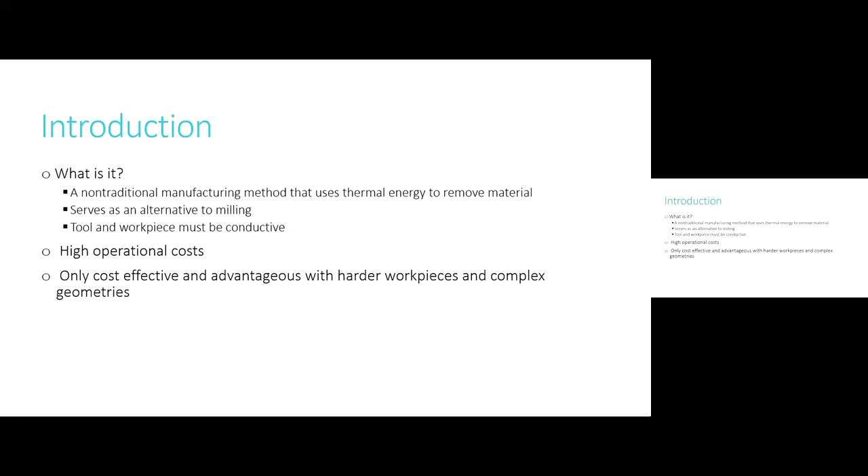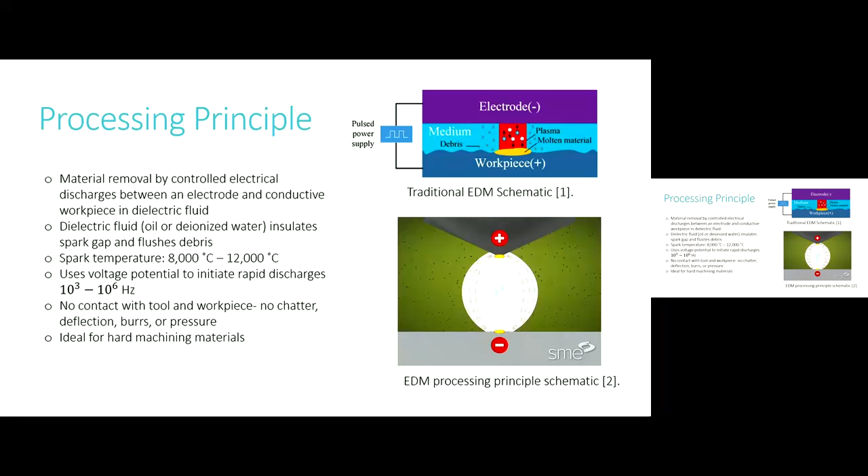Basically, when the voltage increases between the electrode and the workpiece, it's going to break down the dielectric fluid, releasing a spark that is going to act as an extreme localized heat zone up to 12,000 degrees Celsius. This is also a no-contact tool process, and it's also ideal for hard machining materials.

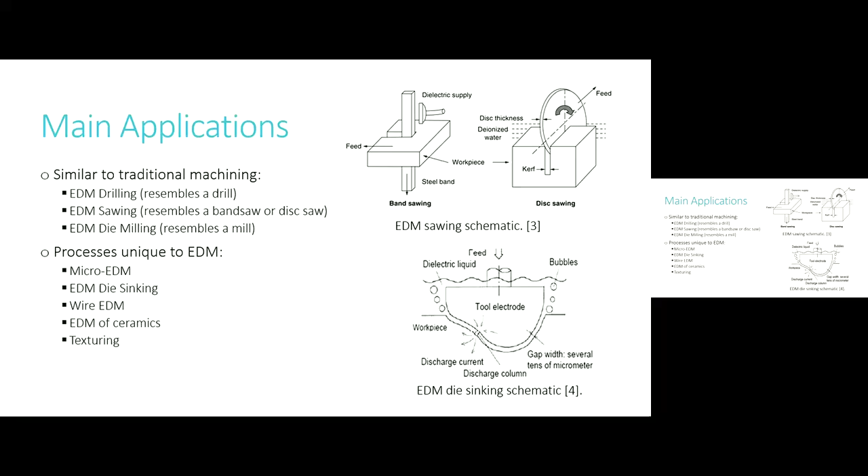Some of the main applications of EDM, we have some of the parts of EDM that resemble traditional machining, such as EDM drilling, which I guess you can guess resembles hand drilling. There's also EDM sawing, which, as you can see in this image on the top right over here,

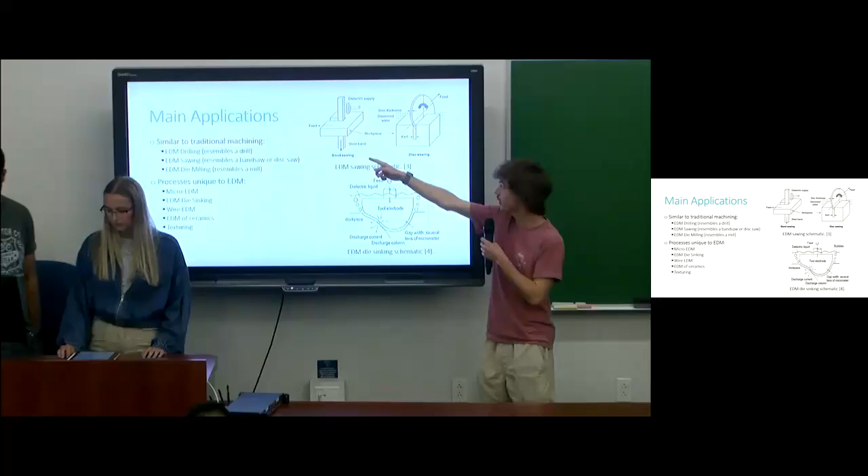resembles band sawing or disc sawing, but instead of a mechanical cutting where the cutter makes contact with the material, the tool uses electrodischarge to remove material without actually contacting the workpiece through that voltage difference in the sparks.

There's also EDM die milling, which just resembles traditional milling. There's a spinning rotating tool that uses electrodischarge to machine material rather than an actual cutter.

There's also some processes that are more unique to EDM, such as micro EDM, which we'll discuss later, EDM die sinking, which you can see on the bottom right here, which essentially makes an impression of the die by removing material with the tool, which is shaped like the die. There's also EDM of ceramics and texturing. Some of those last ones are the main applications of EDM.

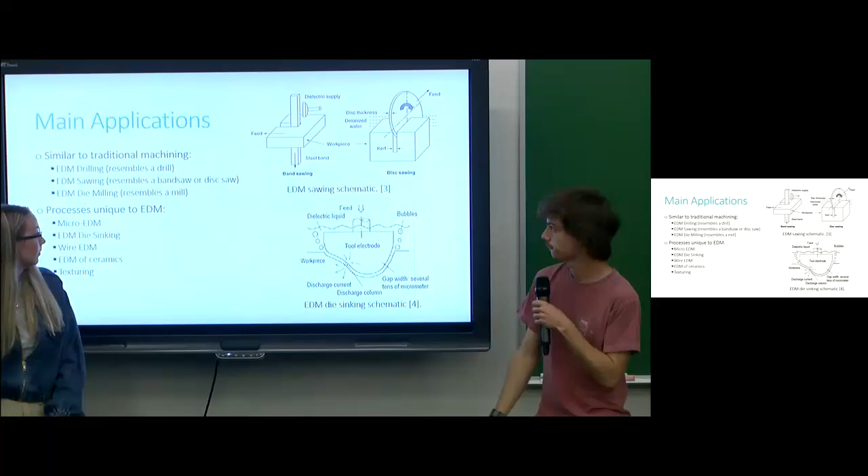Just to give you a better example of what EDM is and how it works, here's that die sinking. The tool itself is machined in the shape of whatever cavity you want to remove from the workpiece, and it is slowly introduced into the workpiece and slowly gets lowered in more and more with each pass, and there's sparks that are generated between the tool and the workpiece to remove material.

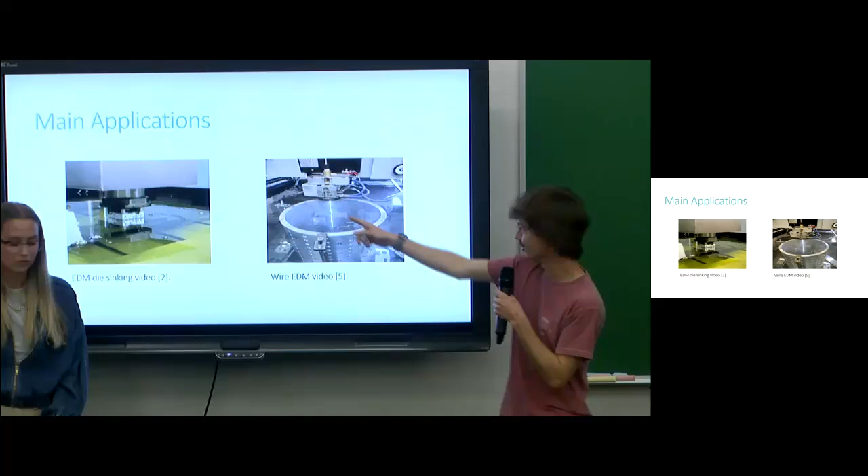Similarly, we have wire EDM here, where the wire itself is the tool, and this is the workpiece right here, and sparks are generated between the wire and the workpiece through that voltage difference, which removes material. You can see it because there's this giant blue line here. That's all of the sparks being generated, which is pretty cool. You can actually see it removing material.

The wire is constantly being refreshed because every time the spark is generated, that wire isn't usable anymore. So you have to add new wire every time.

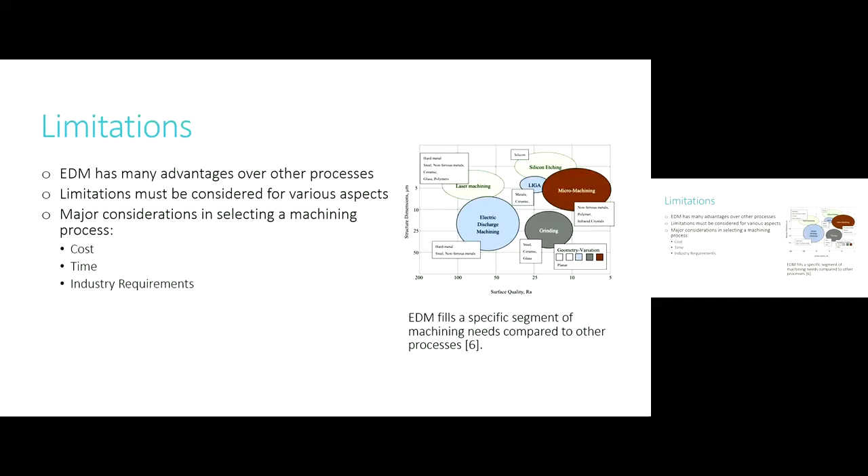So like I said, one of the biggest considerations, not just for EDM, but for any machining process, is the cost, right? So the cost kind of breaks down to two major categories. You have fixed cost and variable costs. So for fixed cost, that's things like purchasing the machine, purchasing the parts, routine maintenance, things like that. And your variable cost is things like labor, different electrodes, dielectric fluids, one-off maintenance items, staff, things like that.

So in addition to considering those, you also have to consider what you're using EDM for, right? So if you want high production speed, high production volume, or if you have very specific product parameters, that's also going to increase or decrease your cost for EDM. So like any other process, you have to balance what you need with the cost that you're willing to spend on EDM.

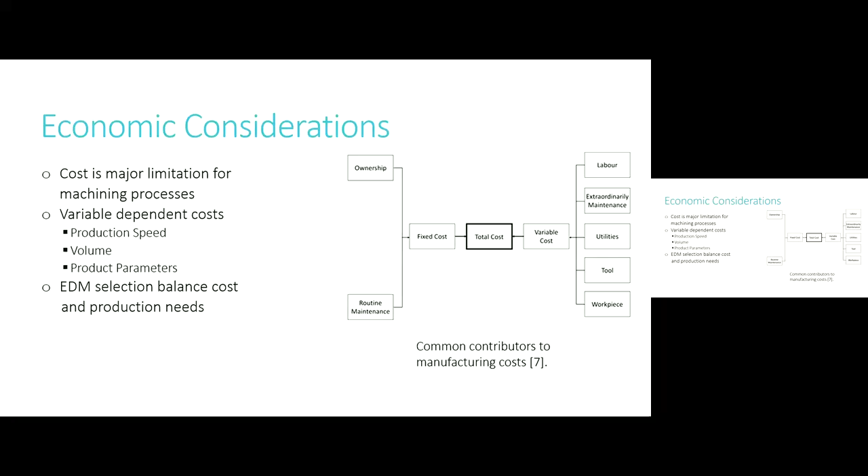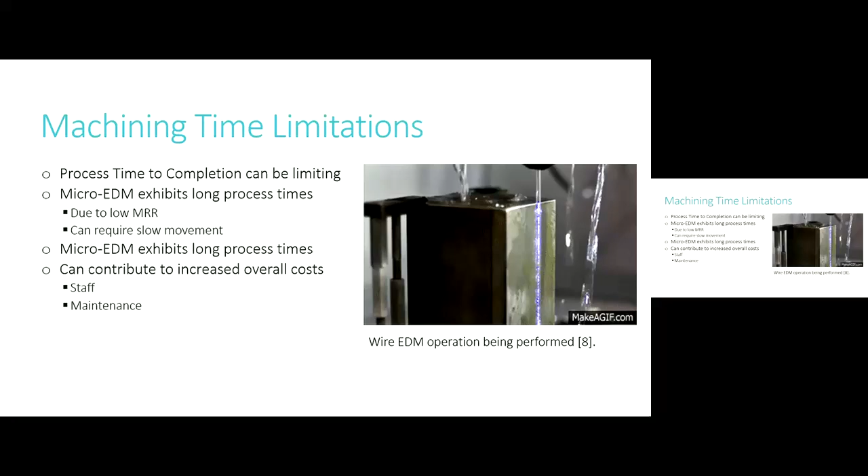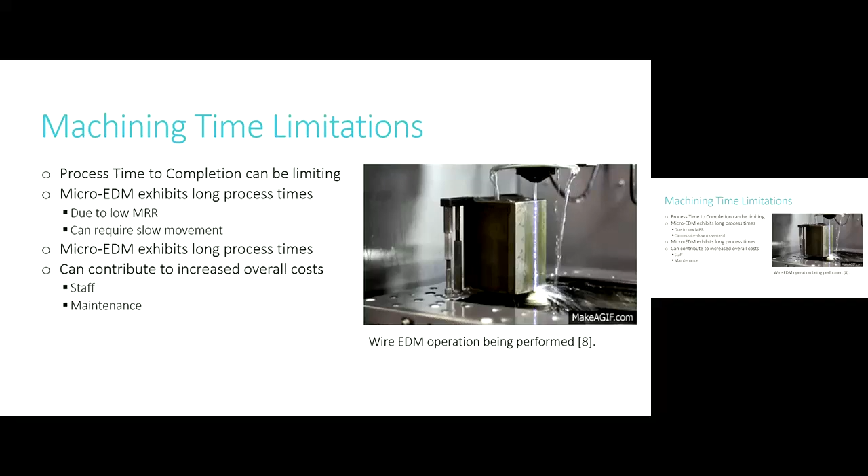So because they require long process times, they're not necessarily the best suited for a lot of high volume mass production applications. And then, since they take a while, longer machine running times increase costs because you have to do more maintenance and you have to pay your staff longer hours to work those machines.

And of course, from a tool wear material limitation standpoint, the tool for the EDM machine is the electrode. So like any other machining process, it's going to wear down. So in addition to accounting for normal tool wear in your machining process, you also have to make sure that the electrode shape stays how you want it, or you account for the degradation to make sure that your output product matches the dimensions and requirements it has.

EDM is also very material dependent. So you can see in this figure here, part A shows molten material that resolidified after machining. Part B shows debris that got stuck on a machining surface, and part C shows cracks on a surface, all after EDM. So even though EDM is very good for certain applications, it's not perfect, so it can leave these impurities that you have to account for depending on what your part is going to be used for.

And of course, it has a large range of tools available, so this can complicate tool selection, but can also add expense if you need multiple tools for multiple different types of machining operations.

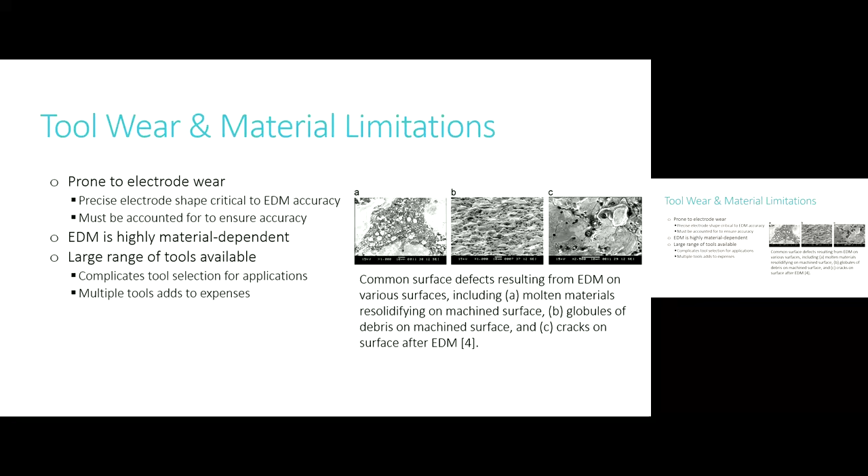So current research for EDM is focused on evaluating different performance metrics for different methods and materials. Some of the methods that help with EDM are ultrasonic, electrodischarge abrasive drilling, and PEDM. These are some of the ones that are currently being investigated. So ultrasonic assisted EDM uses an additional vibration, and this helps flush out debris in that spark gap, and it also increases the MRR.

For the abrasive drilling, that uses abrasives, which increase the surface quality, and it also helps flush out additional debris in that spark gap. Powder EDM adds powder into the dielectric fluid, and this increases the MRR and decreases the tool wear rate.

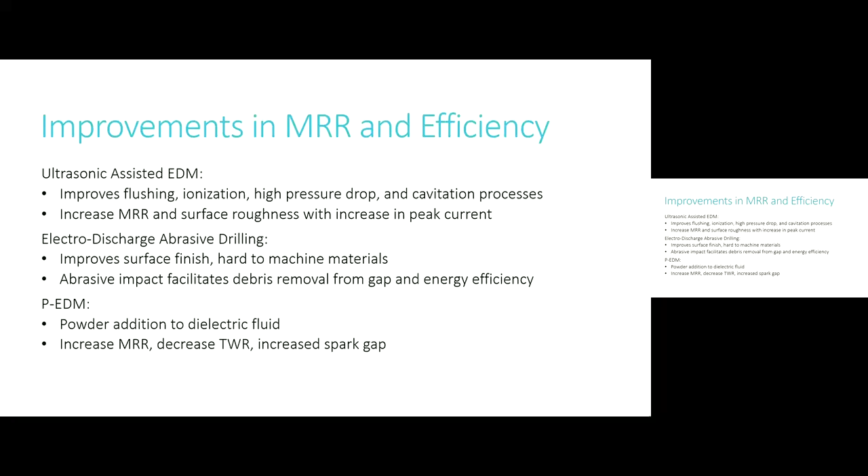Ceramics are pretty challenging to machine because of their brittle nature and their high hardness, and they are also poor thermal conductors. So current research is evaluating different methods to manufacture ceramics using EDM. Two popular methods are die sinking and wire EDM. So there are three material removal mechanisms.

There's also thermal spalling, which is caused by internal stresses that expand and contract, and this causes interior crack propagation, which results in large chips breaking off the workpiece, and this affects the accuracy of machining ceramics.

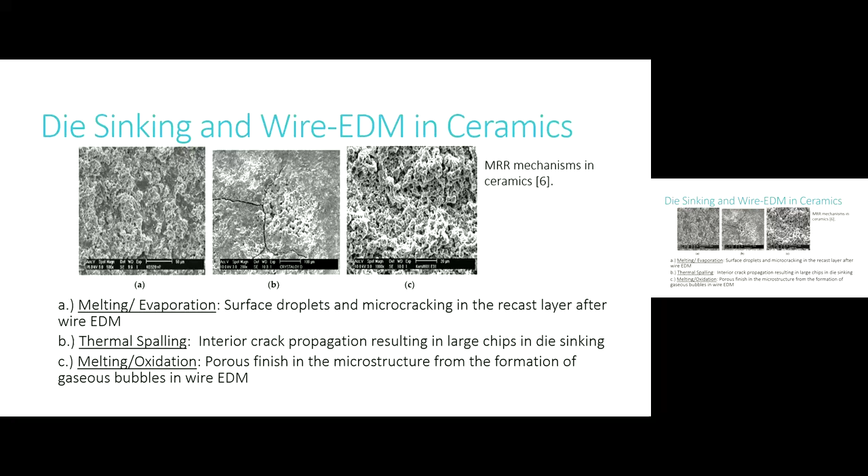The last one is C, which is melting and oxidation. This is common in ceramics that oxidize. So they're going to have a porous finish in the microstructure, which affects their strength, and this is caused by gaseous bubbles that form from wire EDM, and this basically makes them less effective for load-bearing applications.

Another way to improve this parameter is to utilize microenergy discharging. However, microenergy discharging does increase the machining time, so there is a little bit of a trade-off with that. And then adding vibrations to the process will also allow for better flushing, especially when machining micro holes, so it'll allow for less taper and increased quality.

And dry EDM is a process that replaces the dielectric fluid with a gas. This gas is typically a sulfur hexafluoride and air mixture, which will allow for a high MRR, especially in comparison to either one of those gases alone. This process has a primary drawback with the particles sticking to the nozzle. This can be avoided by adding a secondary nozzle to the overall tool. The main advantage of dry EDM is the avoidance of the environmental hazards that are posed by the dielectric fluid.

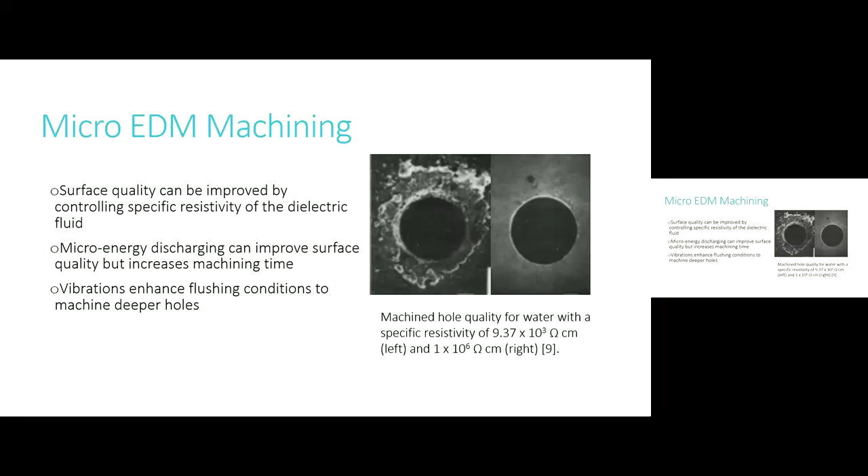For my question, you talked about dry and wet EDM. I was wondering if there's a difference between the surface quality and the surface finish between the two. So dry EDM has a little bit worse surface quality and MRR just because it's using air to flush the chips out, which is a little bit less than using a dielectric fluid. But when the parameters are altered and adjusted, they can be somewhat similar, and gas EDM has the advantage of better environmental impact. Thank you. I'll also add, typically the dielectric fluid helps with cooling because it is such a hot process with the sparks. And fluids typically just have better cooling properties than gases too.

Any questions? Maybe I can ask one. I want you to ask, not me. Any?

So powder. So what kind of powders and then what size? Because you don't want to short. Yeah. I'm not sure about the sizes, but one of the powders that I was reading about was a copper powder, but it wasn't proven to be that effective just because of the properties of the powder itself. But I know depending on what type of powder you use, it becomes more effective just from the properties. Okay. Yeah, we don't want to create a short, so yeah. Thank you. Any other questions?

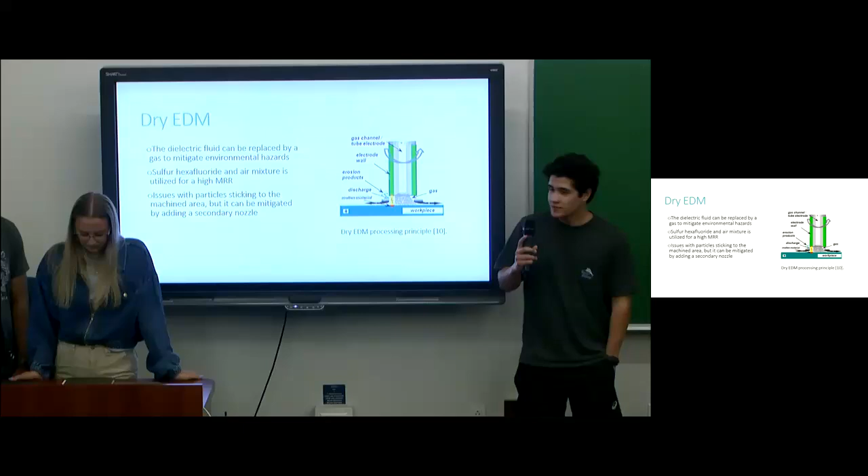I believe all the gases are typically, I know some of them are noble gases, like they use argon also, so it's just not really gonna ionize with the sparks, and it just allows to continue to focus the sparks to the workpiece while also somewhat flushing out the chips.

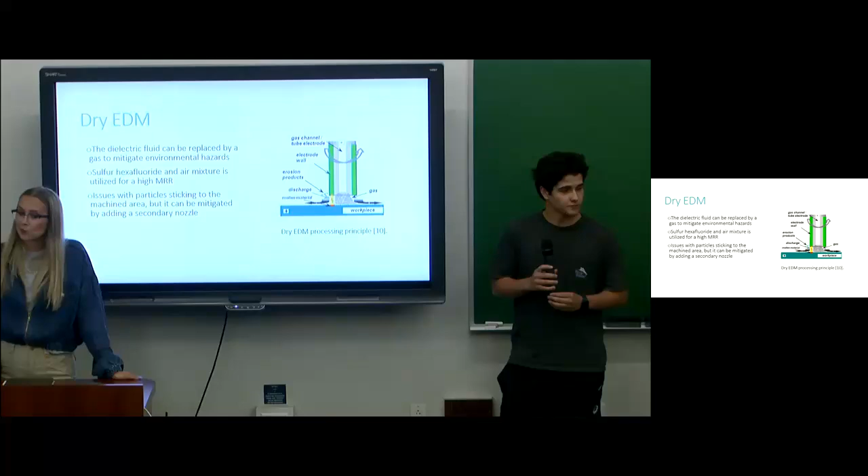Okay, I think that's about time. So let's thank the speaker. Yeah. Okay, next team. Yes, please. Okay then. That might be easier actually.

So, we are presenting our overview on laser welding. I am William. I'm Ansh Patel, and I'm Vaibhav Kumar. Our fourth team member is sadly not here as they had to be in Texas. Anyway, here's an outline of what we're doing. Basically, what is laser welding? How does it work? What's used in laser welding? What's the state of the art and what's going to happen in the future? What are some current applications? What are some current problems? And what can we do to solve those? Then references and questions.

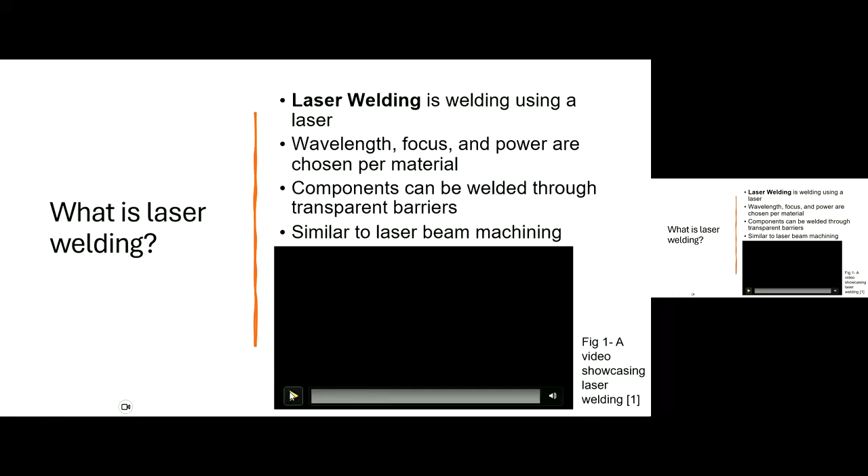So here, what is laser welding? Well, it's welding with a laser. You choose your wavelength and focus and power depending on the material, and you can weld things. It even works through transparent barriers like water or glass for really old stuff. Here's a nice little video. Basically it works like laser beam machining.

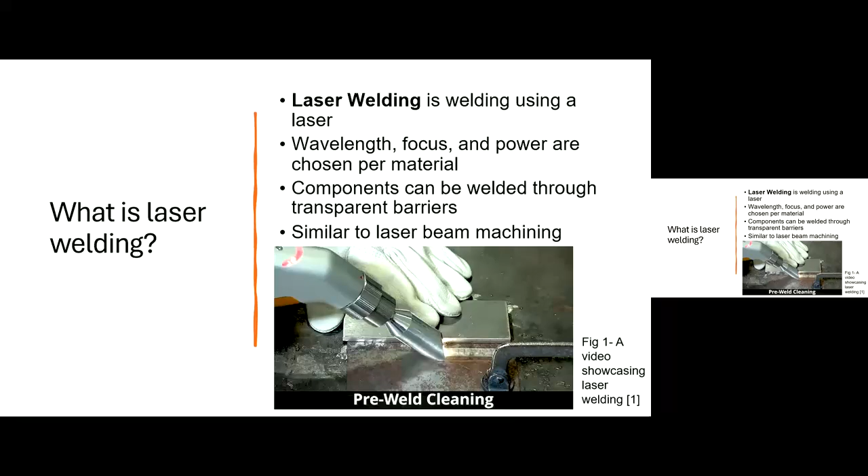So here's a more in-depth section on how it works. The laser is focused on the surface, and the ridiculous power density melts a tiny little spot. And then some of it will vaporize too. And that fuses two pieces of metal together, and now they've been welded. You choose your wavelength depending on the material, because some materials reflect things at different wavelengths.

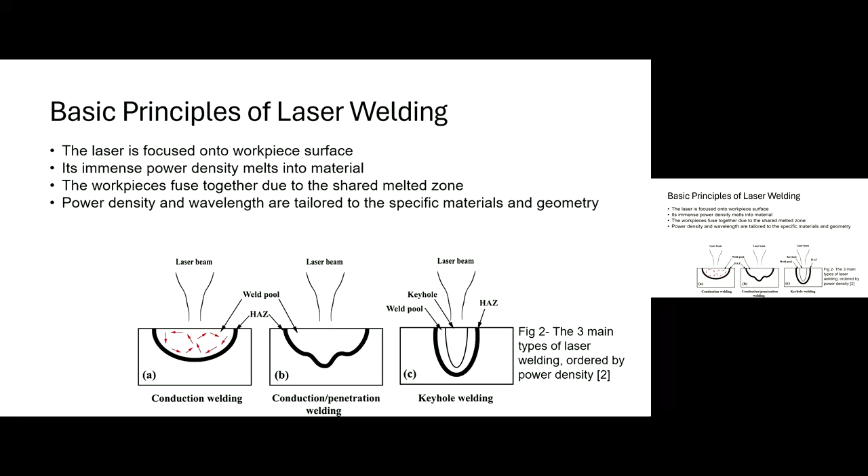All right, so next up is the laser welding machinery and equipment, how it basically works. So first, let's look at the sources which have evolved over the years. The very first the industry saw was a CO2 laser. They were really high power, used for thicker metals and non-metallic substances. But they had longer wavelengths. So if you know anything about lasers, longer wavelength means energy per photon is really less compared to shorter wavelengths.

So then came the neodymium-doped yttrium aluminum garnet laser, short for Nd:YAG lasers, which are shorter wavelength, suitable for metals and for more precision work. And also they were fiber delivered. We'll talk about it in a second. That is the most revolutionary thing laser has ever seen. And next is fiber lasers. So do not get mixed up with the fiber delivery system, because in fiber lasers, they use a fiber core to excite the doped materials in the fiber core to emit the lasers out of it. And it's the most compact, maintenance friendly, and has high electrical to optical efficiency.

Next would be how do you deliver the laser out of the source, right? One of the options was mirrors and lenses. But if you're using mirrors and lenses, you have to constantly calibrate them because they're prone to getting decalibrated, and then you would have to fix it, or you would get really bad weld quality. So next up was optical fibers. These were the most advanced tech that has ever been used to deliver the beam. This uses optical fiber to direct the laser straight on. So they were more flexible, more precise, more accurate. They completely eliminated the calibration part of mirrors and lenses.

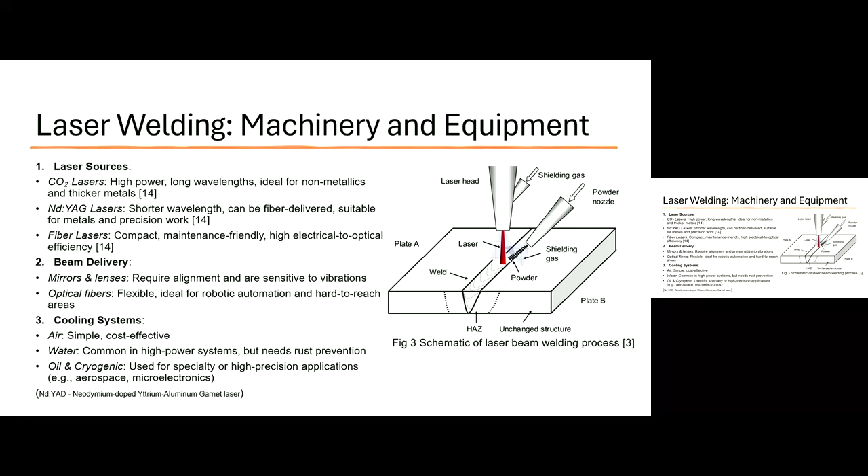Next is cooling systems. It was just air, a simple cost-effective way. Water, the only drawback of water is rust. And the next step was oil and cryogenics. They are specifically used for aerospace and microelectronics, where you need really high precision and really minute details where you cannot afford to have heat-affected zones.

Next was the evolution of lasers. It's pretty simple. As I said, CO2 was the first one, used in structural and aerospace. The neodymium ones were used for pulse mode welding. Next up was fiber lasers. These are the most popular and most highly effective lasers currently used. And right now, the current work is going on adjustable beam shaping, where there is a tailored distribution of laser energy.

So traditionally, there is just a single core where you focus the laser and it just bombards all the energy in a single spot. But instead of that, there is an outer ring associated with the core, which is around 40% of the strength of the core. The core is still at the same strength, but there's an additional layer of 40% strength of energy, which kind of conditions and preps the metal, I would say, to give it a better, smoother finish, as you can see in the video. The ring spot has a better quality compared to the standard fiber laser.

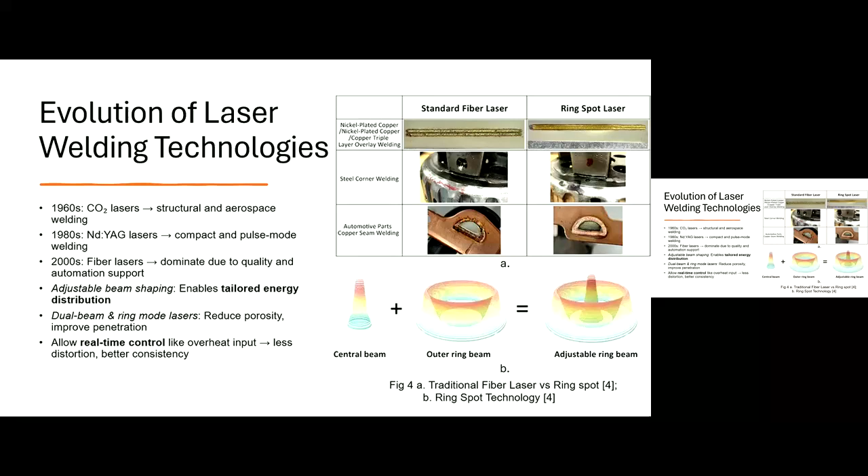Next was dual beam and ring modes, which we just talked about. A dual beam, of course, is like using two beams at the same time, which are used for very, very precise applications. And next, the current research is going on around real-time control, to constantly monitor what's going on by using optical sensors and all.

State of the art and current future. So current innovations are hybrid lasers. It's a combination of arc fillers and lasers. So arc welding and lasers are combined to give better depth to thicker materials. Next was vacuum laser, using a vacuum environment to get the laser weld done.

The other one is laser beam oscillation. This is my favorite one because this uses a dynamically moving laser beam to give a smoother finish to the laser weld. So that's like this. It moves in an oscillating pattern to give a really smooth and refined finish, so technically we avoid the after-polishing of the laser weld. And the upcoming ones are AI and machine vision, green lasers, and ultrafast lasers, using really femtosecond ones.

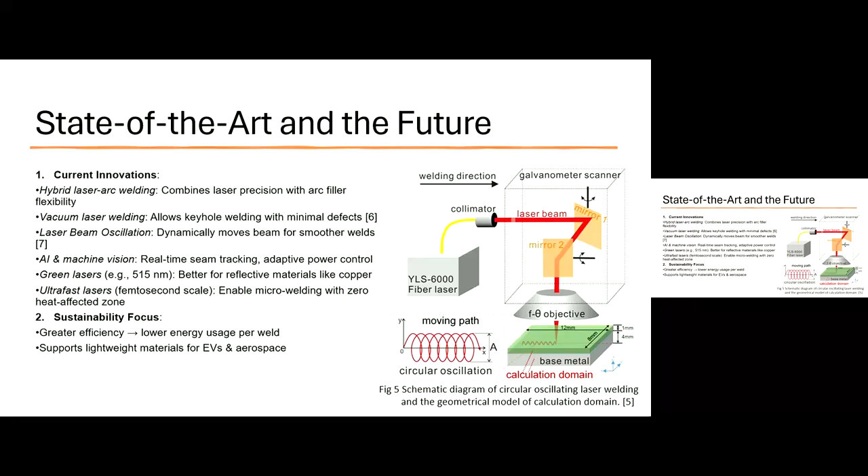And next up is applications. So the applications have been really wide ever since it came into existence. Aerospace, electronics, and medical. The best one is medical because they can now have really precise welds without any kind of seams, which is what the medical field requires.

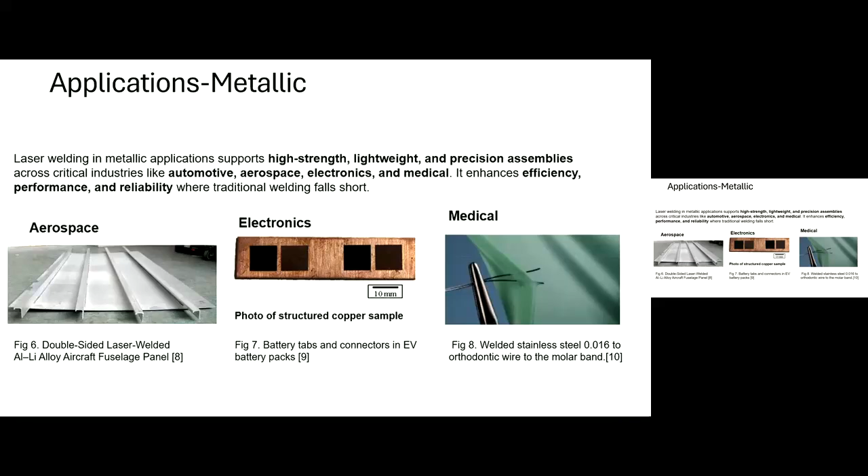All right, next. After the applications, we're gonna look at the advantages and disadvantages. Advantages obviously are high precision and also minimum heat damage, which is heat affected zones. It's also fast operation, but we're gonna see that when we're operating too fast, there's a chance of humping defect, but we're gonna see about it later. There's also the fact that laser welding is more compatible with automation systems like robotics. And there's also no filler material needed, so they're clean welds.

The disadvantages are, like other machines, high initial equipment cost. It also requires maintenance, and we need clean and precise joints. It's also challenging to work on thick or reflective materials as of right now. And we also need safety. So the authorized personnel who get to work with the lasers need to be trained so that it's safe.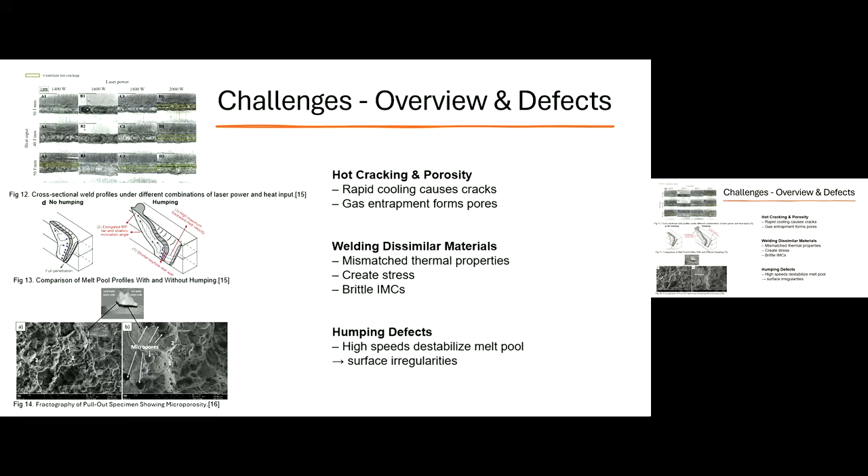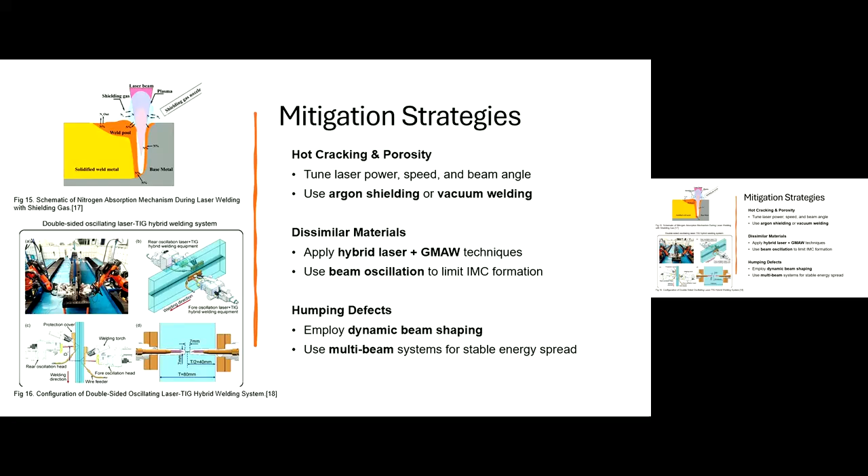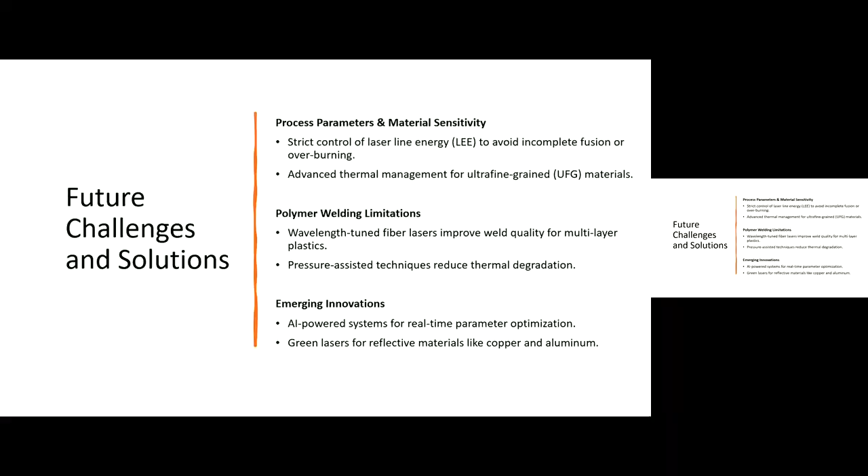So you touched on this a little bit at the end, but for handling reflective materials, you said one of the innovations was essentially switching out the laser to have a different wavelength. Does that tend to be effective? Do reflective materials just absorb specific wavelengths, and is that a widespread solution? You just cycle through different lasers to get something for that specific material. Does that tend to be a good solution?

So no material reflects all wavelengths of light, but sometimes they may have to treat the material surface to make it more amenable to laser welding. Okay, thank you. Any other questions? Yeah.

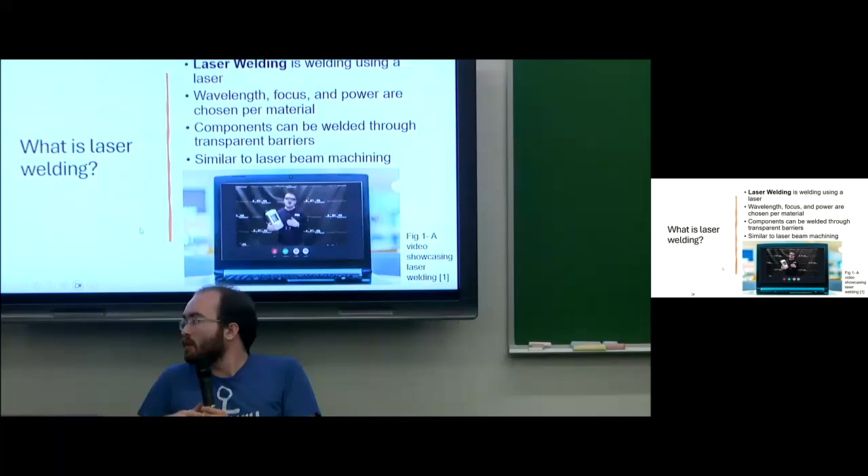So I know with typical welding, some of it's machine-based and automated, and some of it's handheld. Is there a handheld option for laser welding, or is it all machine? Yes, there are handheld options. Go to the first slide again. I believe it was in the video. So you will want to be careful because you can blind someone like 100 feet away with one of these. Wow. Okay, I see. Very cool.

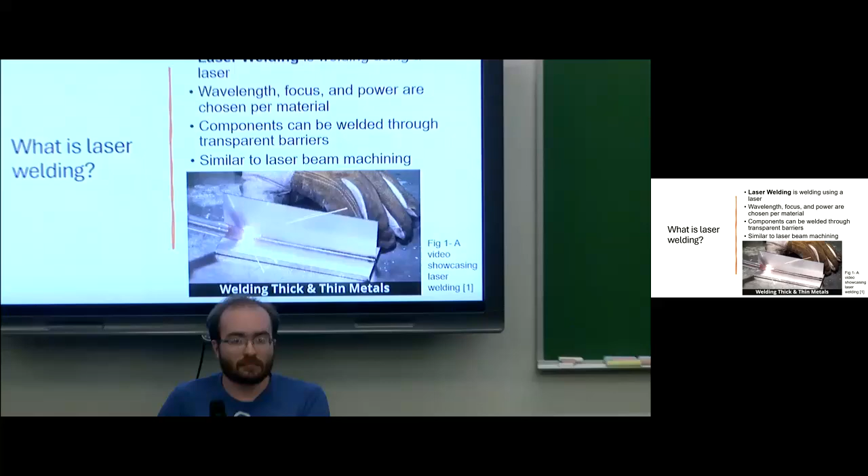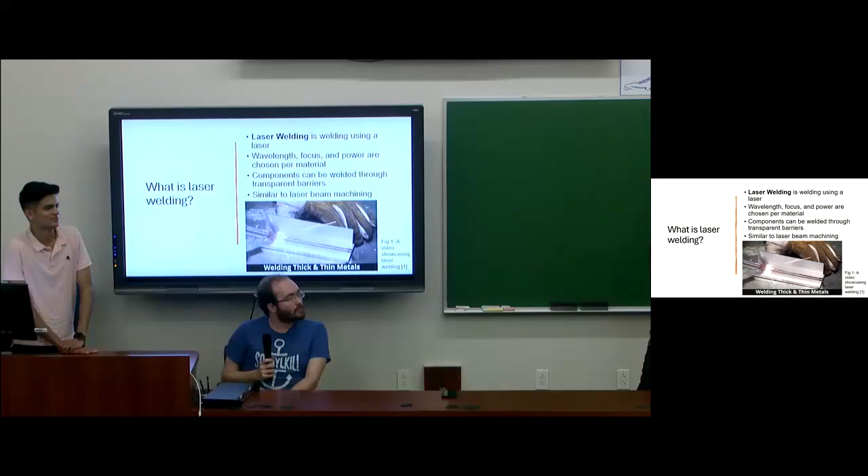Any other questions? Maybe one more we can take. Maybe I can ask one question. I think I misheard, the vacuum. I think vacuum welding, and then you said it's more like precision or something. So how does it work? How do you connect vacuum and precision welding?

So for vacuums, usually whenever there is a specific metal which is very prone to getting affected by atmospheric elements, if we use vacuum welding, we can avoid oxidation. We can use inert gases, but if you use a vacuum, we would get the same results. And also, we would prevent harmful gases from escaping the controlled laser environment, because lasers evaporate some of the material we are welding due to their high power, which causes a hazard for the operators and everyone. So it has many benefits.

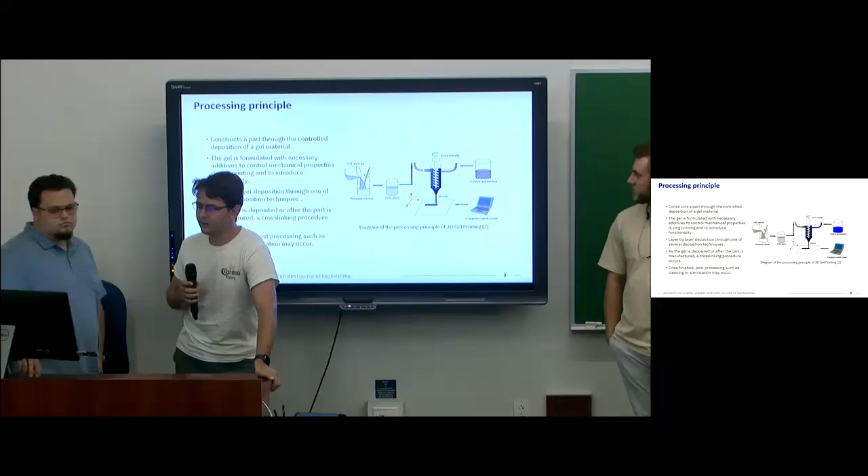So 3D gel printing is a new additive manufacturing technique that enables the printing of functional components, soft components, and bioactive components through the controlled deposition of a gel material. Those gel materials are typically polymer gels or functional particles suspended in polymer gels, the most common type being hydrogels, which are a class of highly hydrophilic polymers, usually with a water content of around 90%.

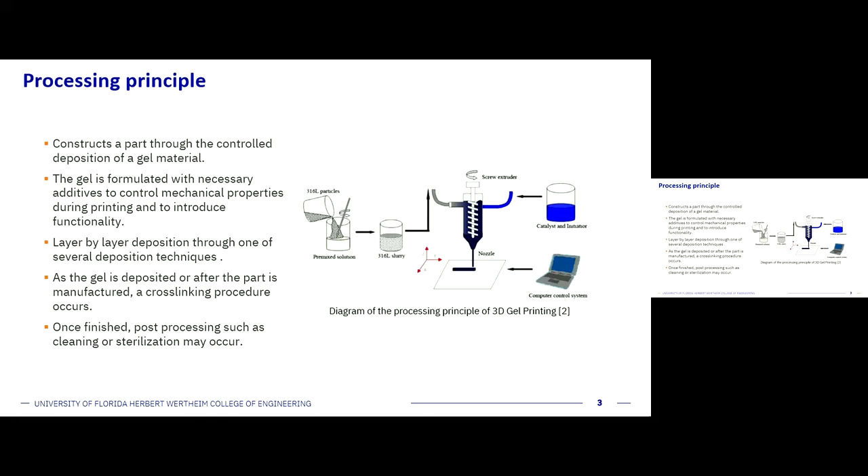So prior to printing, the gel is formulated with any necessary additives, such as functional particles to increase biocompatibility, electrical conductivity, or any other goals. The gel is then deposited layer by layer. As it's deposited, it's cross-linked so that it's strengthened, cured, and gets a rigid shape. After that, the part may be post-processed with cleaning, sterilization, or any other necessary functional additives.

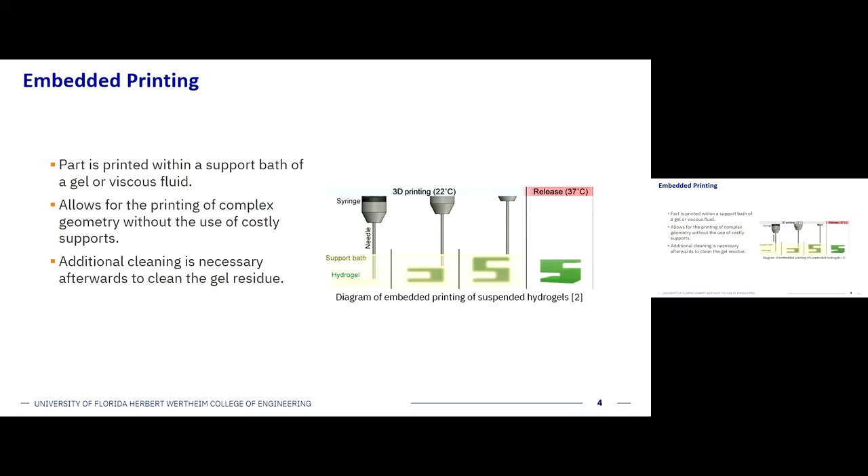Next slide. So another process that has emerged alongside this is embedded printing, which involves printing inside of a gel or a viscous liquid. So you don't need supports or any other secondary sacrificial materials. The gel substrate acts as the supports, and afterwards you just need to clean off the gel, and you can print very complex geometries without wasting a ton of material on supports.

So a very important part of the 3D gel printing procedure is cross-linking, which is the way that the different polymer chains of the gels are linked and rigidified together.

So this can be done either through physical methods or chemical methods. Physical typically involves the thermal cooling of a heated gel or other non-covalent interactions such as van der Waals forces, hydrogen bonds, or anything of that nature, whereas chemical cross-linking is covalent bonds between the different polymer chains, typically through photopolymerization, enzymatic reactions, or chemical initiators.

And physical cross-linking has the advantage of being reversible, so it can be used in things like drug delivery or edible printing, where you don't necessarily want the part to be fully rigid, whereas chemical cross-linking makes a much more solid structure for use in load-bearing parts or structural parts.

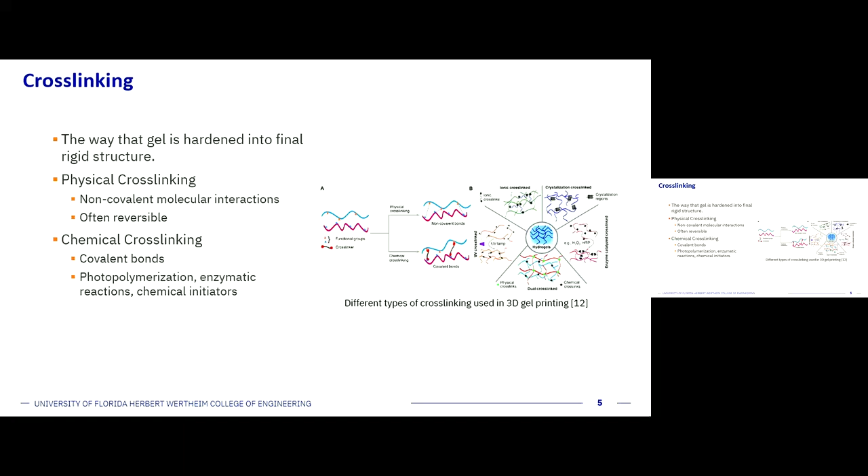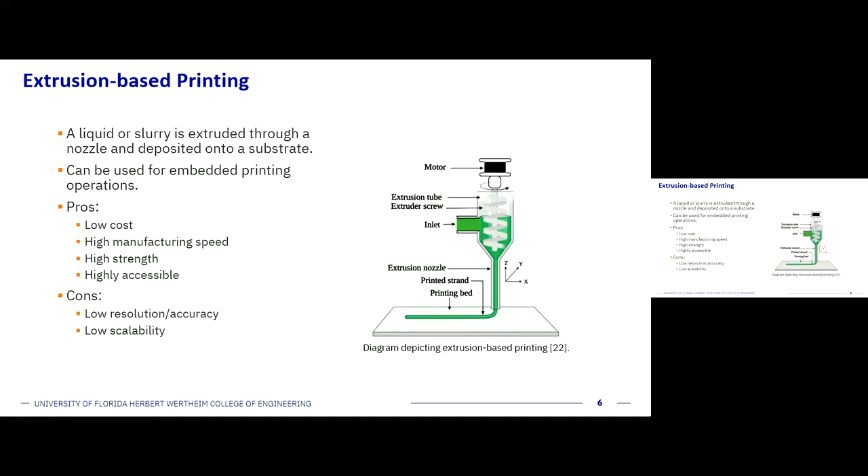So there are four most common 3D gel printing methods. The most common of the four being extrusion-based printing. This is when a liquid or slurry is extruded through a nozzle and deposited onto a moving substrate. This is the one that is used for embedded printing operations. This method has the benefit of having a low operating cost, prototyping parts very quickly, producing high-strength components and being very accessible to most users, at the cost of producing low-resolution parts, and it is also not a very scalable operation.

Stereolithography, another very common form of this, is when UV light chemically cross-links liquid resin in desired regions, and then a piston and platform assembly moves that hardened part out of the way to form the next layer. UV light could be provided by either a scanning laser system as shown in the diagram here, or with an LED display. This is more scalable than extrusion-based printing and produces high resolution parts at high strength, but requires a high operation cost and offers lower material compatibility because it requires components be compatible with photopolymerization agents.

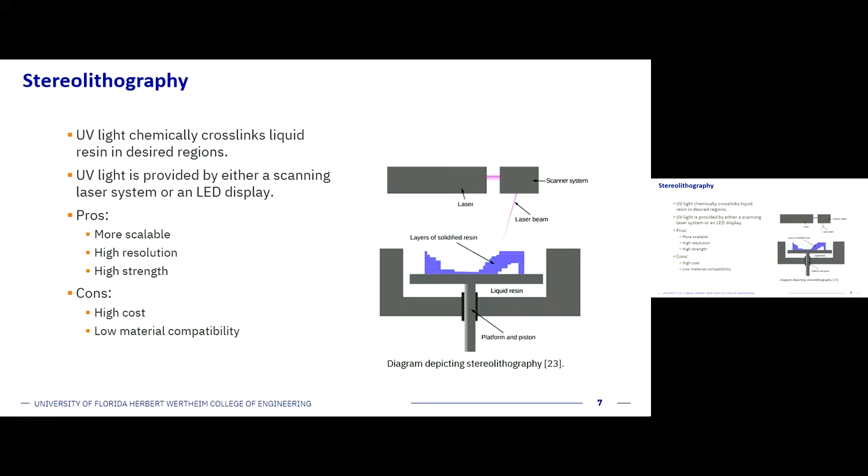Inkjet-based printing is when gel ink is extruded through a nozzle and deposited onto a moving substrate. The extrusion pressure can be generated with a thermal element or a piezoelectric actuator. This does produce high accuracy parts at a low cost, but offers lower material compatibility because it requires low viscosity gel inks and also offers low strength components.

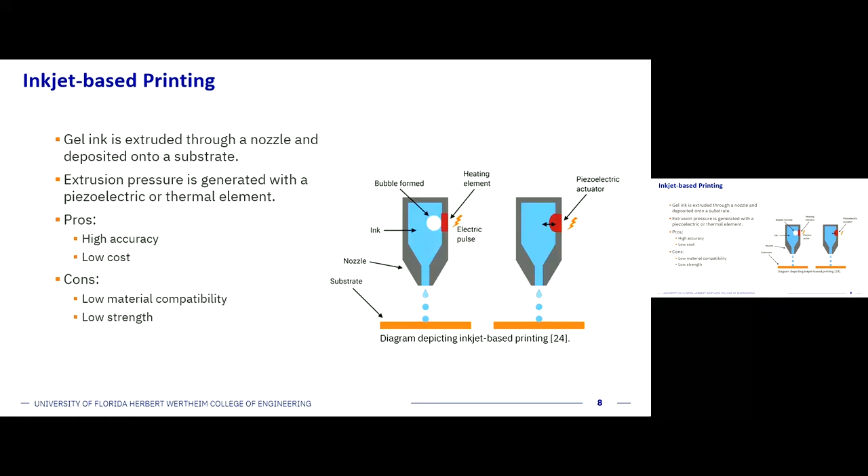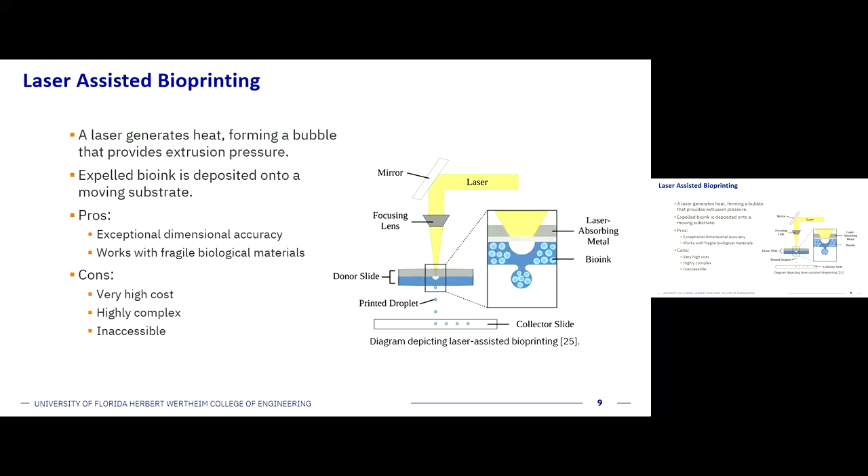Finally, laser assisted bioprinting is when a laser generates heat, forming a bubble that provides extrusion pressure. The expelled bio ink is then deposited onto a moving substrate. This does produce exceptional dimensional accuracy and also works with fragile biological components that may not work so well with a rigid nozzle. This does cost a lot more to operate and is very complex, making it a very inaccessible manufacturing method for most users.

So 3D printed hydrogels have made their way into a range of industries over the past 2 decades or so. 4 key applications have been seen that are significant with 3D printed hydrogels, those being biomedical engineering, soft robotics, edible printing, and consumer products.

Now, the benefit of this is that they offer a safer and more efficient, personalized approach to healthcare. And additionally, research is even starting to look at things like printing artificial organs and custom implants, which is a huge development within this field.

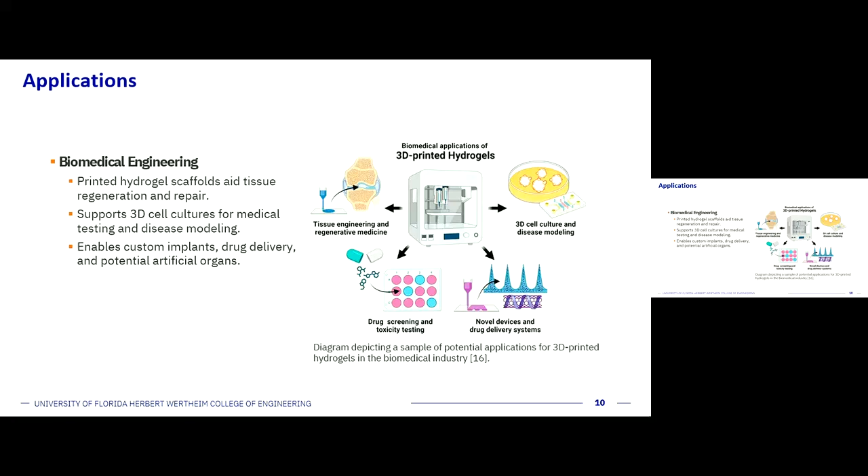Next slide, please. Soft robotics is a subfield within biomedical engineering that builds robots out of flexible and compliant materials instead of rigid ones as seen with traditional robots. And this is a huge advancement because hydrogels can mimic the resilience and lifelike movement of biological tissue, making them perfect for lifelike robotic systems. These robots can be used with assistive devices, minimally invasive surgical tools, and even prosthetics, really anywhere that gentle and adaptive movement is required.

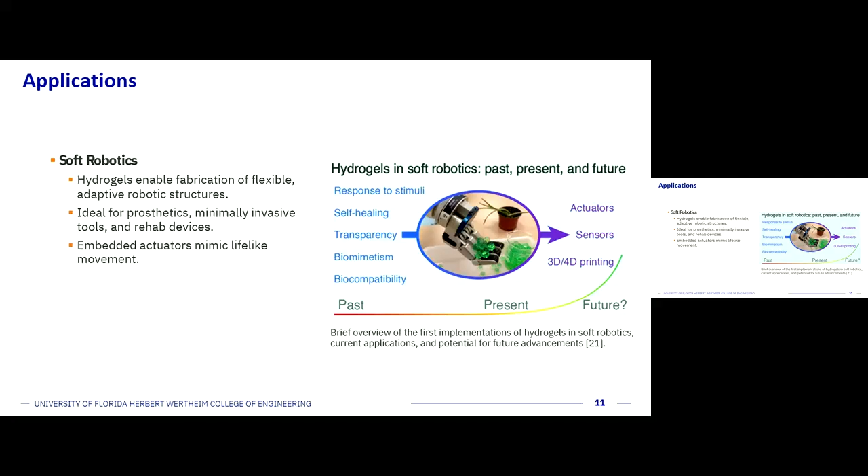Now, thanks to 3D gel printing, these designs can be built with embedded actuators and sensors, making them a lot more comfortable with systems like this, which shows a robotic hand that can interact and actually sense soft gels, which rigid components have a really hard time with.

Next slide, please. Edible printing is also called 3D food printing, and it is gaining traction thanks to its control over flavor, the nutrition profile, as well as texture, which is otherwise hard to achieve with other vegan products.

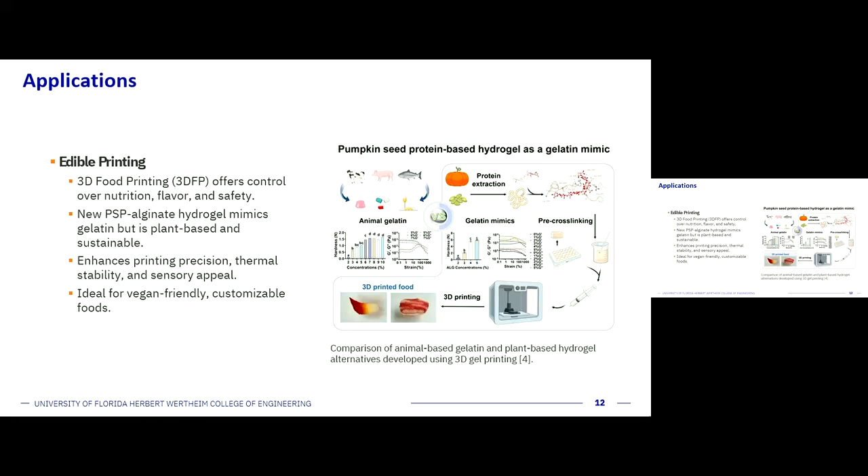A lot of earlier attempts with hydrogels in this fell short due to poor material properties, but advancements and new mixtures have allowed us to explore things like plant-based hydrogels, as shown in this image here, which explores a pumpkin seed protein-based hydrogel mixed with an alginate, which just gives it a little bit of additional thickness and more customizability with the texture. And that has successfully mimicked animal gelatin. So it is a vegan-friendly and sustainable solution that improves thermal stability, printability, and overall sensory quality.

Next slide, please. And last but not least, hydrogels are being used for large-scale production with consumer products nowadays. This image here shows a groundbreaking product called Dimengel, introduced by a company called Massivit 3D. It is a UV curable hydrogel that has allowed the fast production of full-scale parts, including furniture, toys, tools, art, conceptual designs, and other things like that.

And it's already being applied in industries including automotive, marine, and architecture, where visual impact as well as customization is just as important as mechanical practicality. And this is proving that 3D gel printing isn't just a lab-scale innovation anymore, and it's becoming more industrial and a real option for end-use manufacturing.

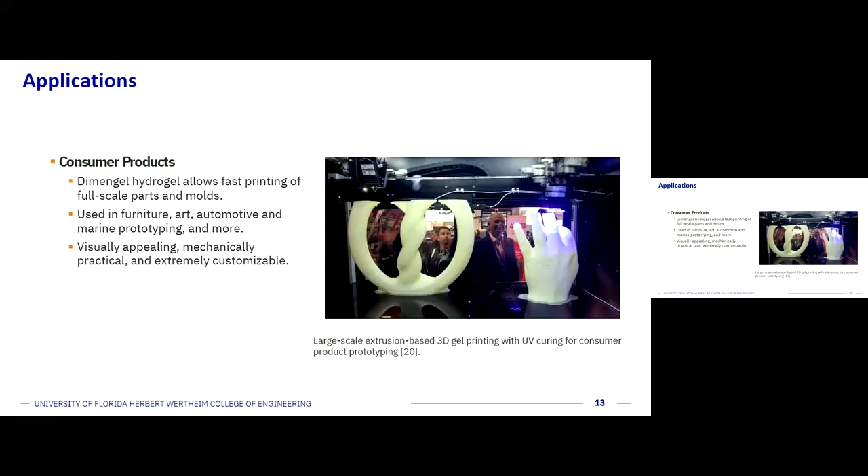Now, to address some limitations, the complicated rheology of hydrogels makes hydrogel printing difficult, as changing the nozzle can drastically change how that hydrogel flows and prints. And there are also scalability issues with this. Cross-linking serves as a bottleneck to manufacturing speed, as you have to wait for the cross-linking to finish or cure before printing another layer. So there are high startup costs for large-scale operations in this case. There's also non-uniformity in synthetic gels, which can decrease cell viability and biocompatibility, as well as decreasing printability.

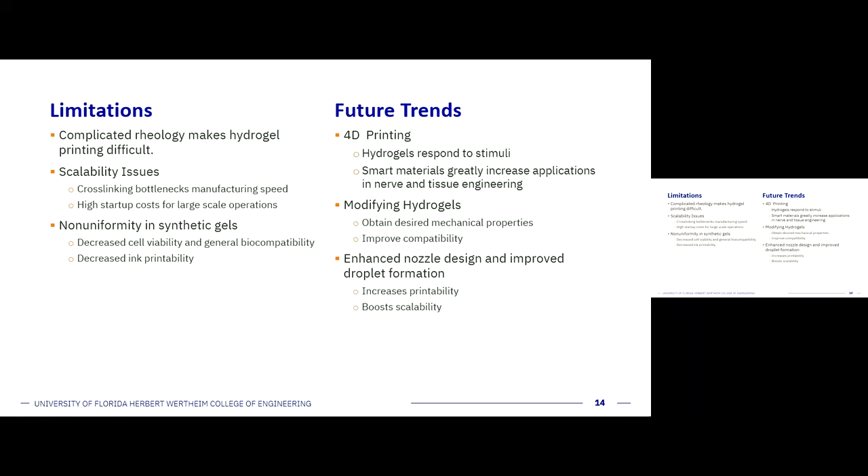To combat these, there are some future trends that the industry is looking into, such as 4D printing, which allows hydrogels to respond to various stimuli. These are called smart materials, which greatly increase the application, specifically in nerve and tissue engineering, as the hydrogels can react to how the body moves. And then further modifying hydrogels allows you to obtain desired mechanical properties depending upon whichever application you are pursuing. And then further enhancing the nozzle design and improving droplet formation will boost scalability and increase printability.

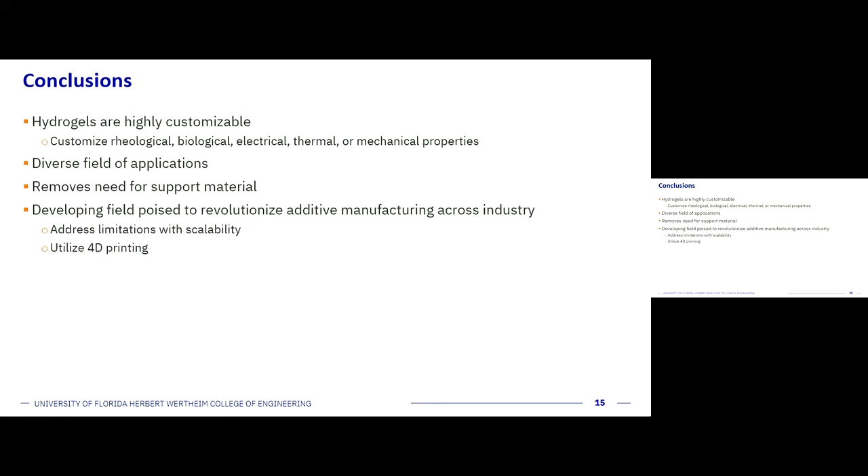So in conclusion, hydrogels are very customizable. You can customize their rheological properties, biological properties, thermal, mechanical. And as a result of all of this customization, there's a very diverse field of applications. And then through the use of the embedded printing, there's little need for support material. So all of this combined allows 3D gel printing to be poised to revolutionize additive manufacturing once its limitations are addressed.

And here are references. Thank you. Any questions? Yeah. Sorry. Two students there.

Why is it called 4D printing? That's referring to time as the fourth dimension. So it's materials that can respond to stimuli and respond in the time domain. So it's like shape memory alloys, that kind of stuff. So maybe her and then him.

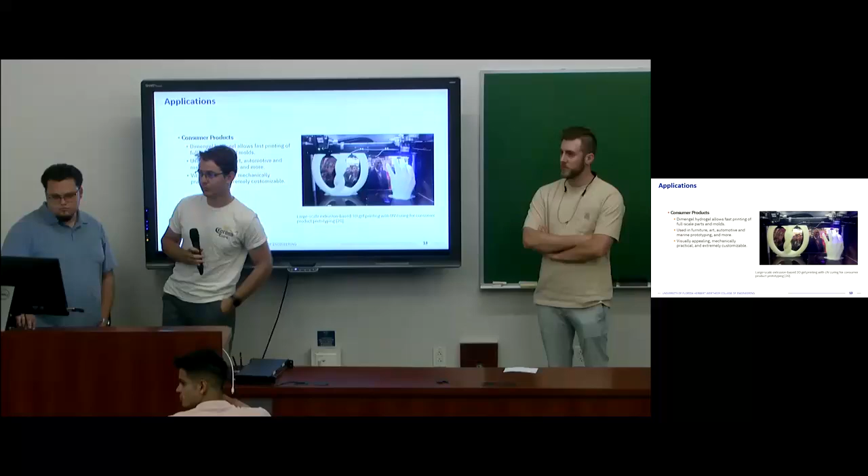For the soft robotics slide, was it the black piece that was printed with the hydrogel, or which part of it? I missed the start of your question. Can you repeat that? I'm sorry. For the soft robotics slide, it was in the image. Was it that slide? The one that had the prosthetic on it? You're referring to this slide here, this robot here? Sorry, I couldn't see it. Yeah, so this is what I was referring to for this slide.

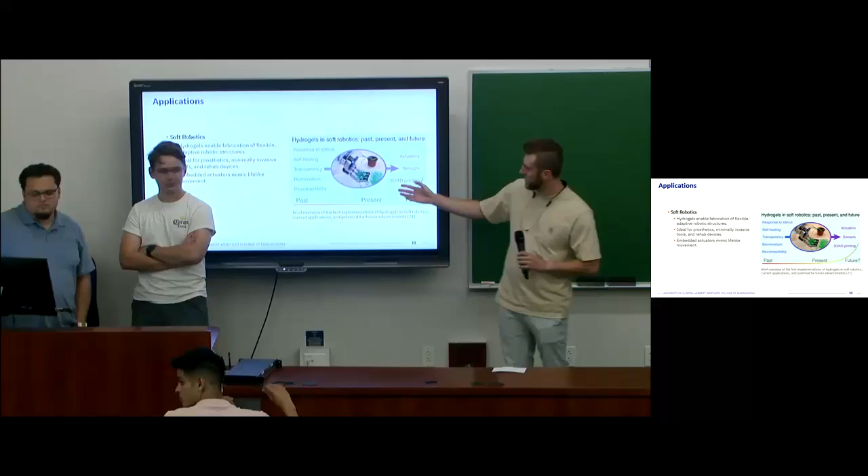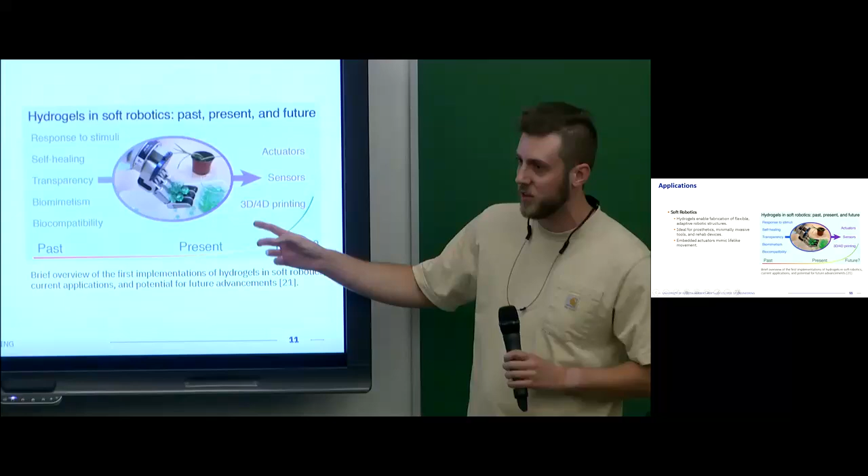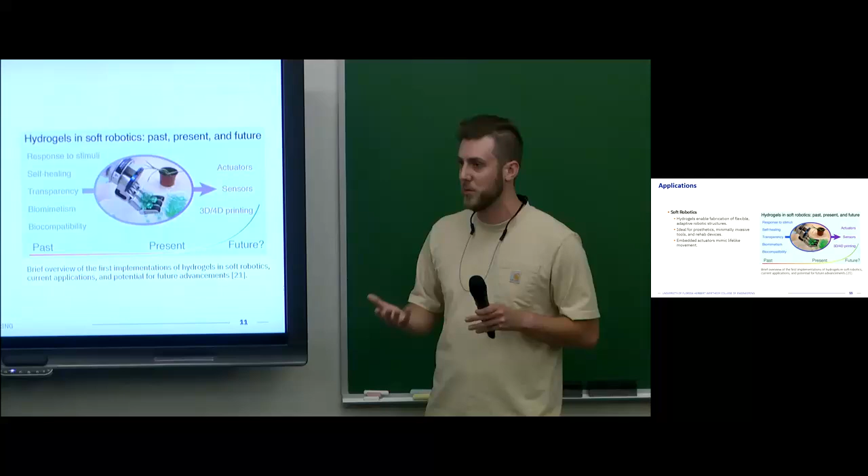So the 3D hydrogel printed portion are these black pieces that are mixed in with the rigid structures, and they have embedded actuators that are actually able to sense these soft gels. And the reason that's a big improvement with robotics is because rigid members typically have a difficult time, unless you have a non-rigid sensor mounted on top on the surface, recognizing flexible and soft products like that, and they can often damage it because without that sensory capability, they have no way of knowing not to squish those or damage them.

Do you know a cost comparison between this and, as you said, hard materials that are used? I'm not sure. I know from other research papers I read, they didn't do a comparison, but I did see that soft robotics is a very expensive field at the time. The manufacturing methods are extremely expensive, so there's probably some improvement to be done there and some material optimization that could help reduce cost. Thank you.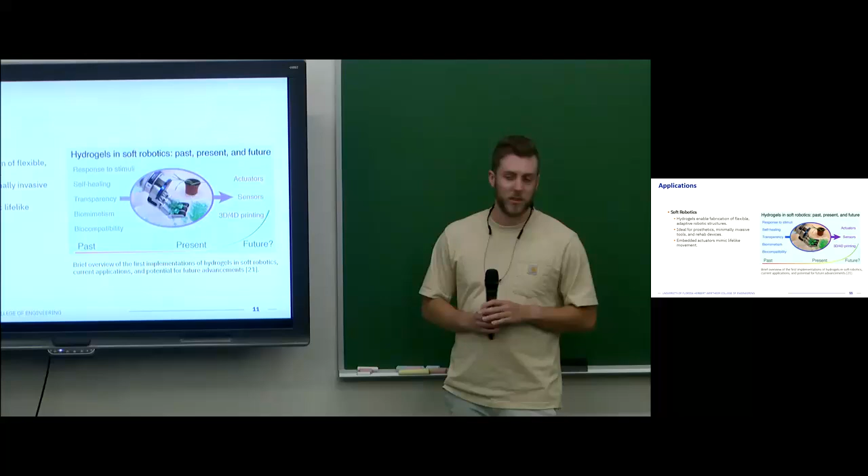You're welcome. So next up is, as you talked about embedded printing. So as we put the prong into the substrate and we move it along, I assume that it would create some kind of void behind it.

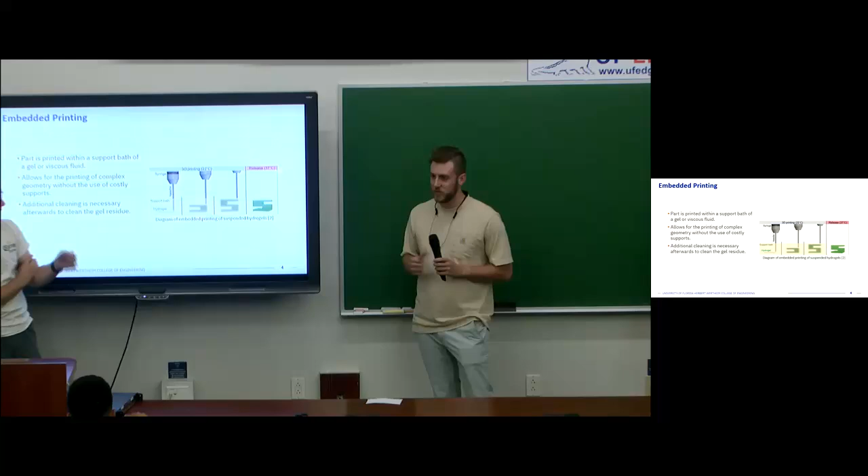So does it like... I don't know if it does with the kind of speed we move it, but if it does, will it affect the printing quality at any point? It shouldn't, because since it's additive, I'll pass this on if other people want to talk about it. But since you're printing layer by layer, and you would embed your sensor on the rigid portion and then pour on top of that, the idea is that the hydrogels would form around the actuator and you wouldn't have any voids inside of your print.

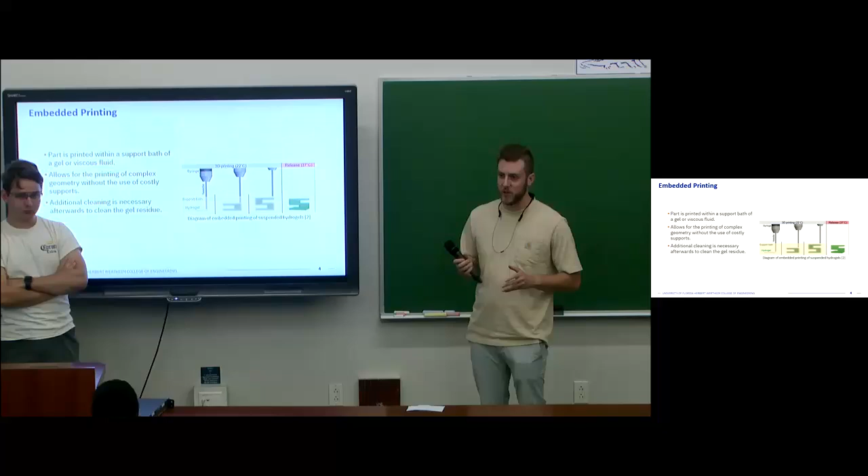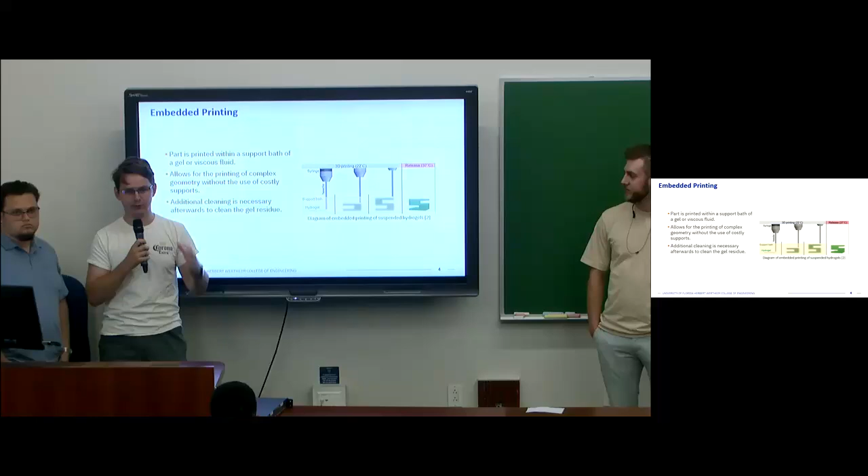Okay. But you definitely do have to move slow so that the support bath can flow back in and maintain shape. And there are issues with upflow and dimensional accuracy, where you're printing the hydrogel here and it flows up a little bit, but as they're working to advance the nozzle dimensions and improve the mechanical properties of the gels, they're working to address that.

Also, the characteristic length of the needle is very short, and the support bath is very viscous. So typically, all the flow surrounding that needle is very laminar, which results in a predictable flow pattern around the hydrogel that you can fine tune to make sure that it won't affect the solidified material once it's printed.

Thank you. So I have a question about the hydrogels too. First of all, what kind of material is hydrogel? Gel or viscous fluid? Do you have any specifics? And then also, what does the cleaning process look like once you remove it? So hydrogels are a series of polymers. They're a very wide family of polymers. The main characteristic is that they have highly hydrophilic side chains, so they can absorb a lot of water, up to like 90%, as I mentioned.

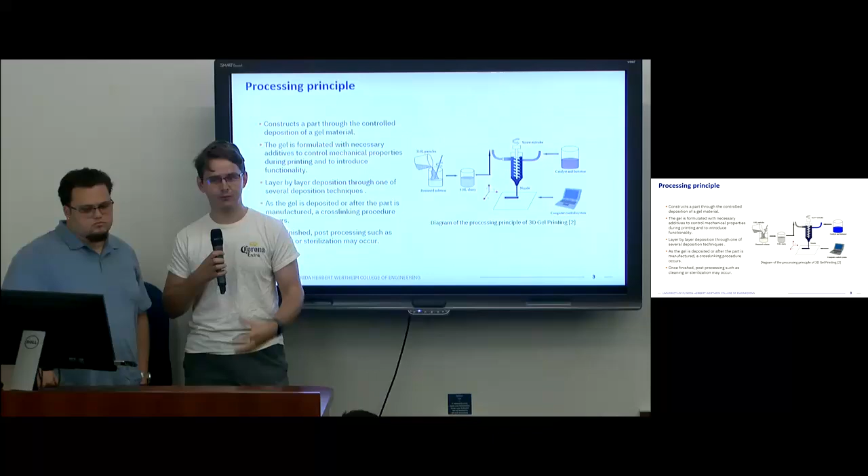And then what was the second question? What does the cleaning process look like when you pull it out of the viscous fluid? Just typical disinfectant and scrubbing and sterilization procedures. You're just trying to get all of that extra residue off. It's just an inert gel, so it's not too much of a concern, but for cleanliness, you want to remove all of it. Thank you. Any other question?

Maybe can I ask one question? So can you bring back the previous slide? No, the one you... yes. So I don't know if you can answer. So you create some S-shaped product in the support bath. So this green stuff is kind of foreign material getting in, right? But the bath level, I always feel like it doesn't go up, right? So are they chemically reacting, or what is happening here? The support bath top surface height does not change, right? So are they reacting, or maybe not, but if you could explain.

So the support bath basically replaces the typical supports that you'd see in an FDM printing process. The support bath is typically just filled to the top of some bin, and it's not moving, and it's also typically inert. So it's just acting as a physical way of supporting the actual printed material, so that it doesn't collapse in on itself, and it can produce viable overhangs.

I think if you're asking if the height of the support bath would change, I think it would, because you are displacing some of the gel with the hydrogel. This specific method isn't chemically reacting with the support bath. You're extruding a second hydrogel inside of this either viscous liquid or secondary gel. So I guess there would be a little bit of fluid displacement as you print the hydrogel inside of it. I see. Thank you.